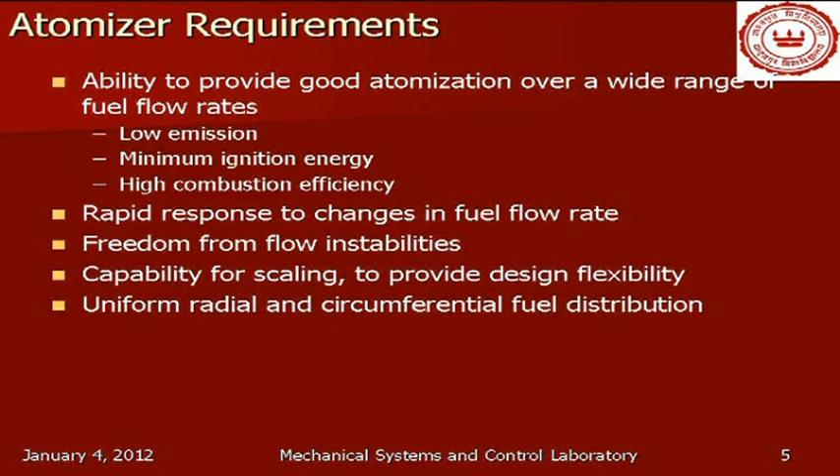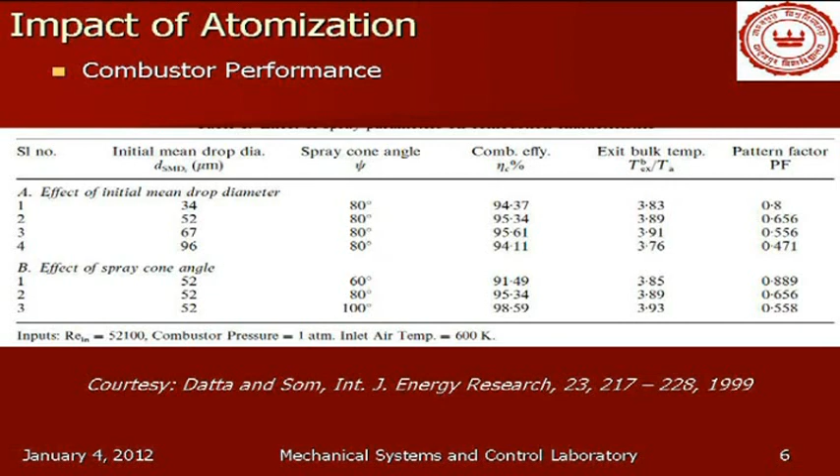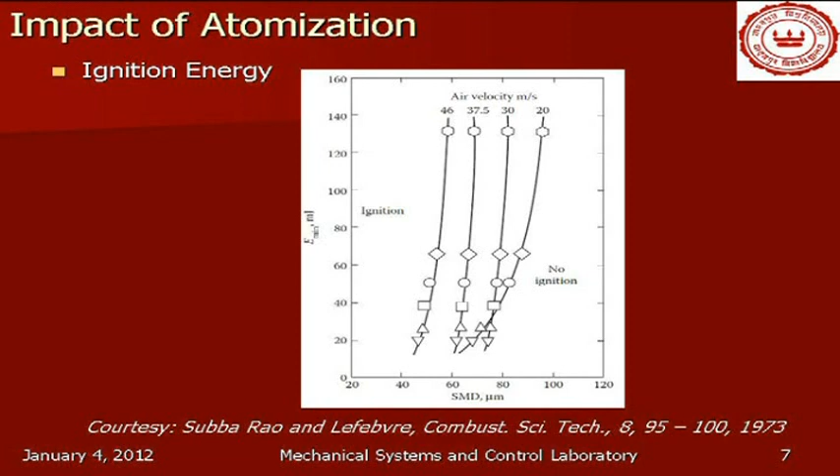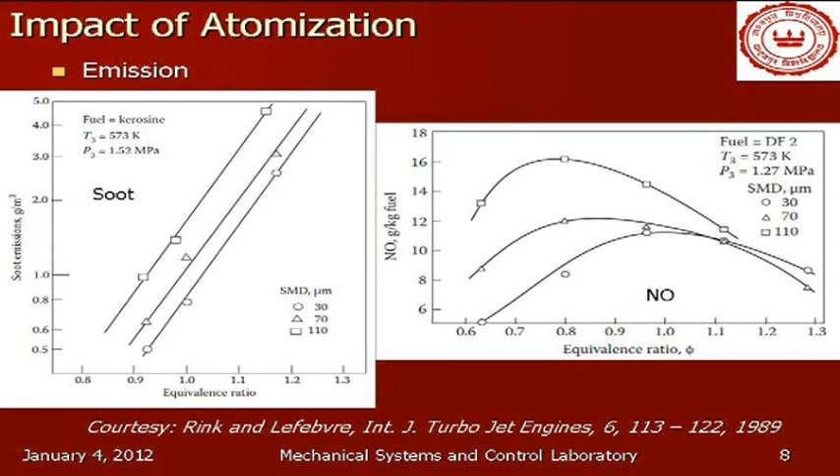But there have been a lot of studies in the literature where the impact of atomization on combustor performance has been studied. We can see that parameters like mean drop diameter and spray cone angle can significantly affect parameters like combustion efficiency and pattern factor. Also, ignition energy is significantly affected by drop size. But in today's context, what is probably more important is the fact that emission of pollutants like soot, NO, CO, and unburnt hydrocarbons can also be significantly affected by the drop size in the spray.

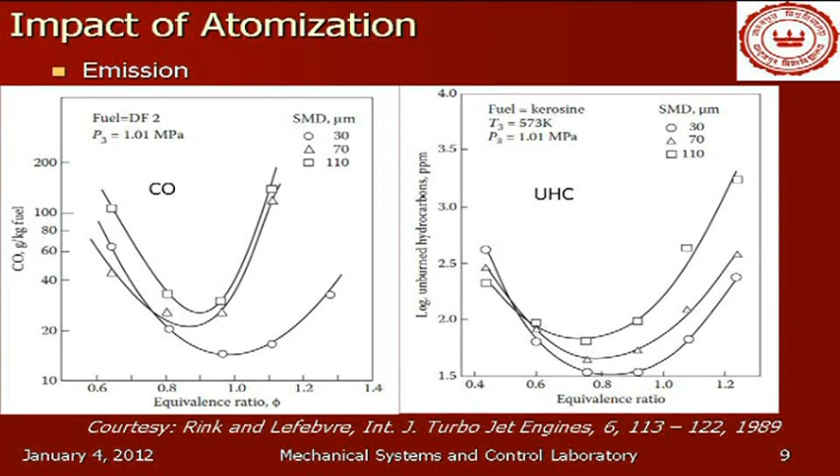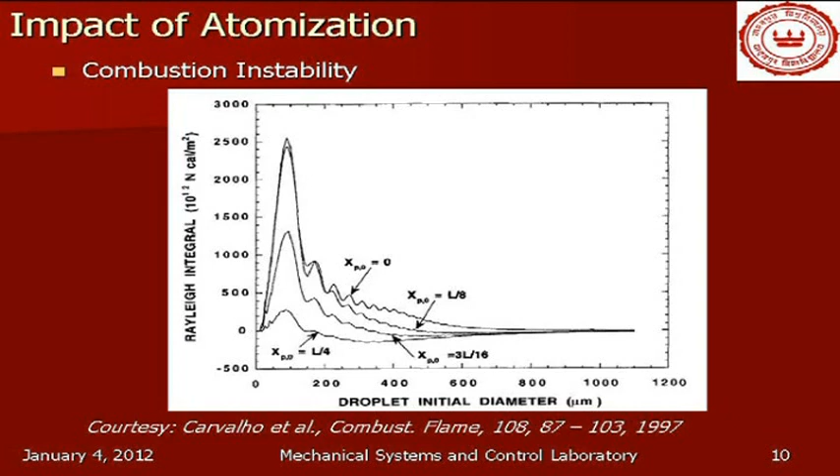Another impact of atomization, which is less often discussed, is that combustion instability can also be significantly affected by droplet initial diameters. So with all these things, when we are to get a good combustion, we obviously need good atomization. That is why this whole workshop is all about, I believe.

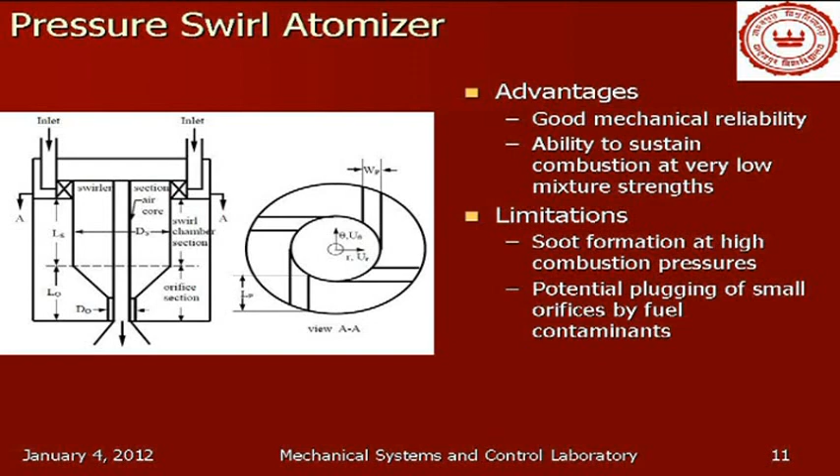As we know, the two major types of atomizers are pressure swirl atomizers, which have advantages like good mechanical reliability and an ability to sustain combustion at very low mixture strengths, but its limitations are soot formation and potential plugging of the orifice. On the other hand, air blast atomizers have the advantage of low soot formation, and the fact that

the outlet temperature distribution is primarily governed by the air flow. The changes in fuel flow do not significantly affect that, so pattern factor is less affected. But it has very poor atomization quality at startup, and it is prone to thermoacoustic instabilities.

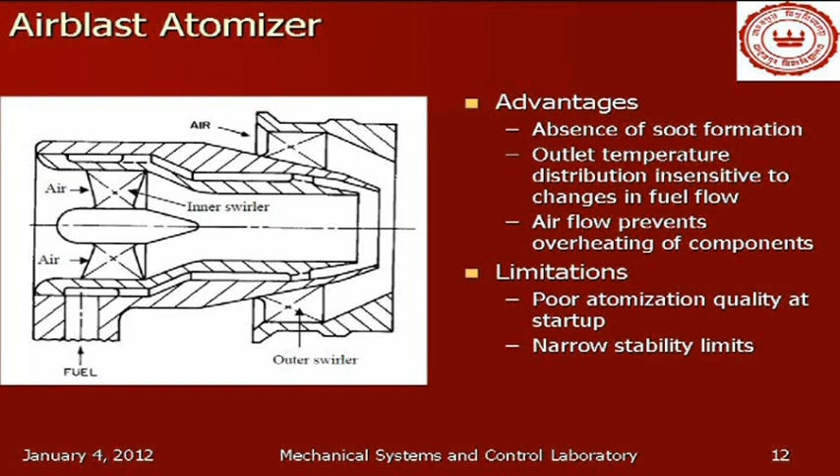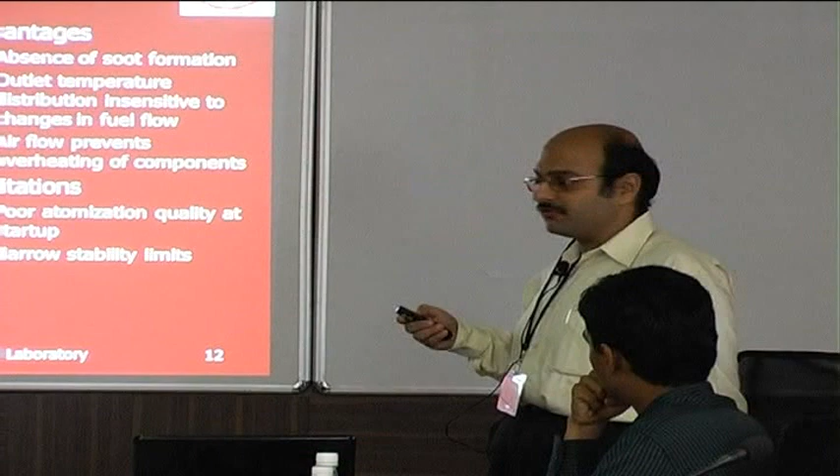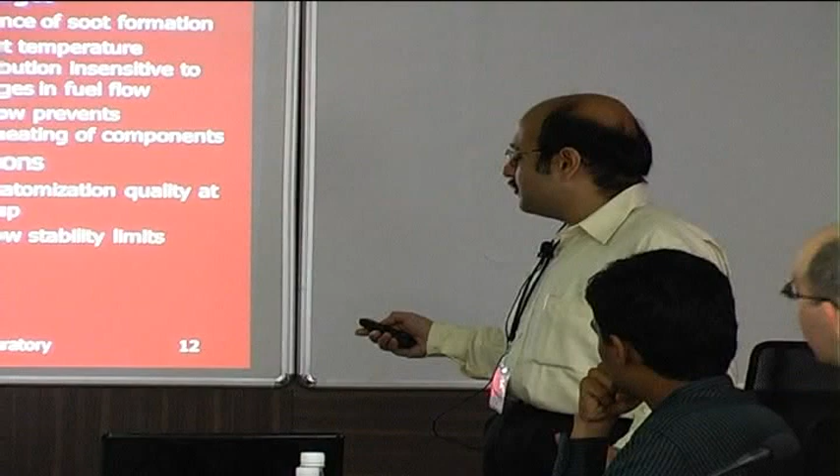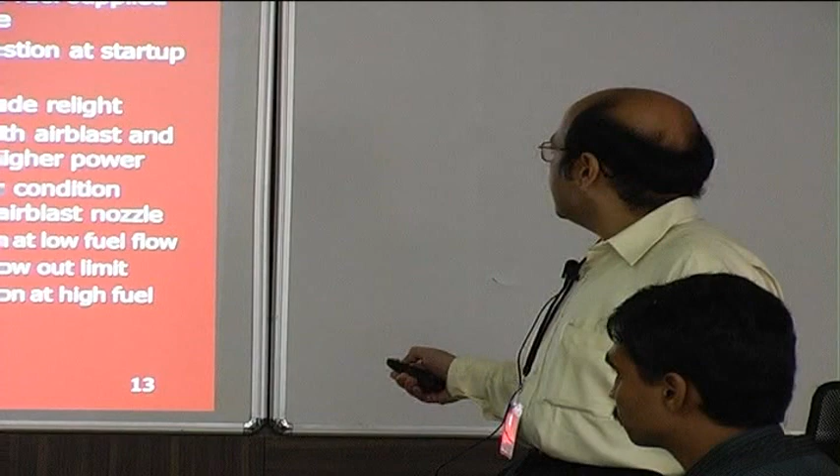Since these two common types of injectors do not satisfy all the requirements of a modern gas turbine combustor, people had to look for new types of atomizers. The most intuitive one being the so-called hybrid atomizer, which tends to put in the best of both worlds. One such design is the piloted air blast, which combines a pre-filming air blast atomizer with a simplex pressure swirl nozzle at the center.

At startup or low fuel flow rate, all of the fuel is supplied through this pilot nozzle, so that the characteristics are similar to that of a pressure swirl atomizer. As the fuel flow rate increases, fuel is supplied to both streams, and at high flow rates, most of the fuel goes through the air blast injector only. So we get good atomization at low flow from the pressure swirl part, and similarly improved lean blowout limit. But at high fuel flow rate, since it is predominantly like an air blast atomizer, it gives a low soot formation.

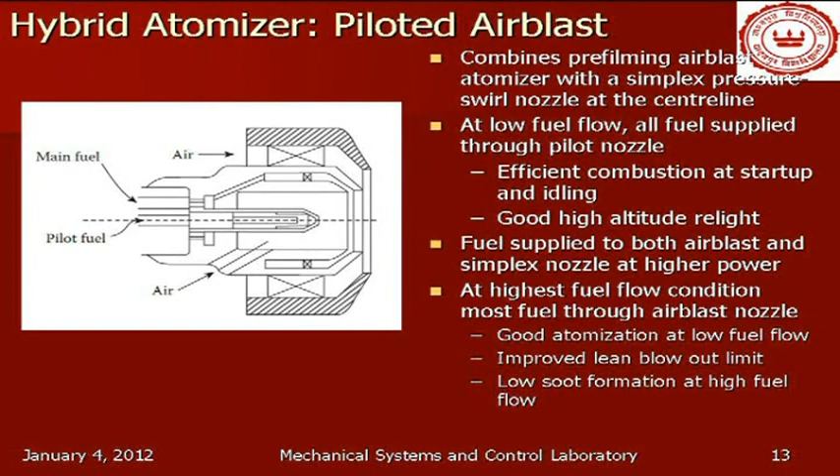A simpler version of hybrid atomizer is the air blast simplex, where all the fuel, unlike the previous case, is supplied through the simplex nozzle. Here what has been found is that an increase in air flow rate always helps in atomization, but increase in fuel flow rate can help or hinder the atomization depending on how it affects the relative velocity.

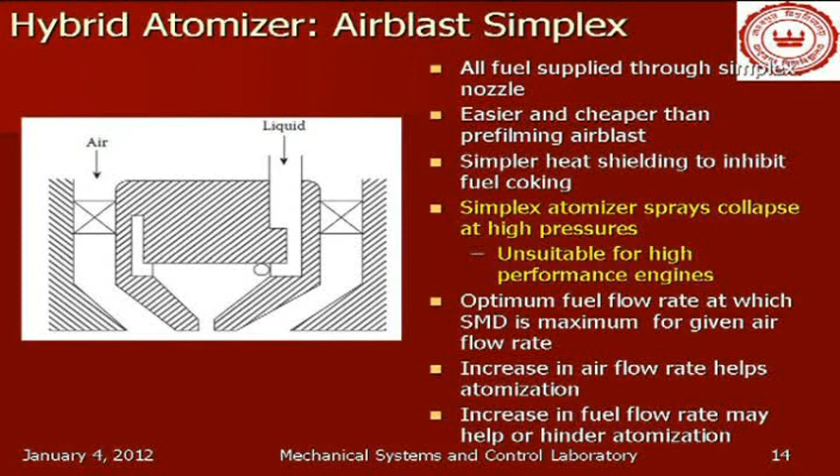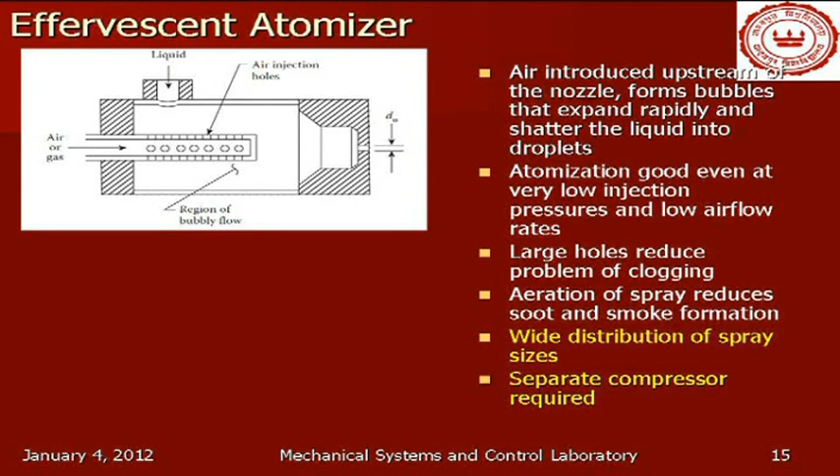Another innovative kind of atomizer, which Professor Raghunandan discussed at length, is the effervescent atomizer, which works on a quite different principle, in that here the liquid is not made into a thin film, instead it's the bubble of gas or air which shatters the liquid at the injector exit. The major advantage is that we get good atomization even with low injection pressures and air flow rates. The aeration of the spray also reduces soot and smoke formation, but it also has its limitations.

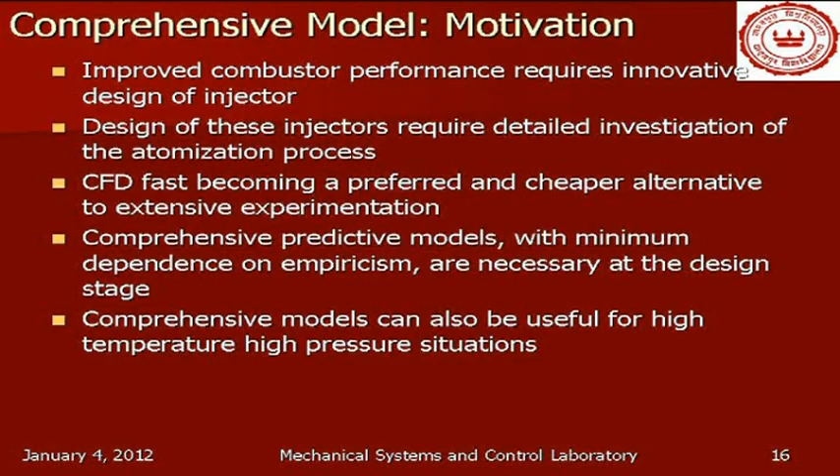As we go for these improved varieties of injectors, what we find is that there are too many parameters affecting their performance.

And so if we want to design these kind of injectors, we have to play around with too many parameters. If we want to do experiments with all of them, that will become a very costly proposition, at least especially at the design stage.

A much cheaper alternative is provided by CFD, especially with the availability of more powerful computers. Even laptops can solve so many of the important problems these days. So what is needed at this stage is to have comprehensive predictive models which will have minimum dependence on empiricism at the design stage. Of course, experiments are necessary, and I will discuss about that also, but there will be more modeling with limited amount of experimentation, mainly to improve the model that can be useful, and particularly these models can be very useful for high temperature and high pressure situations where experimentation is extremely difficult and costly.

So the major steps - this is how in most of the comprehensive models that are there in literature, this is how they conceptualize the spray formation process. The liquid sheet that comes out of the nozzle breaks up first into ligaments and then into droplets, and the comprehensive model should have these three elements.

First is the modeling of the internal hydrodynamics, where you get the inputs from the injector geometry and flow conditions, and as output you get parameters like liquid sheet thickness, liquid sheet velocity, cone angle, and these things then are fed to the sheet breakup model to obtain breakup length and mean droplet diameter. Using these inputs, there is a stochastic part of the comprehensive model which can give you some idea about size and velocity distribution.

Unfortunately, as far as I know, there is no comprehensive model which encompasses all these three elements. There has been quite a number of works involving the first two - Milind Jog is here, they have done quite a lot on this - and there has also been some amount of work on using the last two.

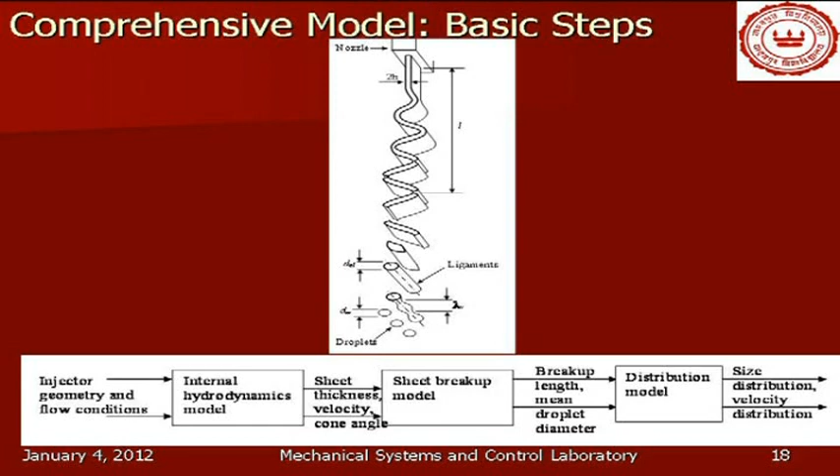Very recently we did some work using planar sprays. It was funded by ISRO, and we are also continuing now for gas turbine sprays in a similar thing.

So coming to the first part of it, the internal hydrodynamics of injector, this is probably the most well established part of the three submodules. Nowadays one looks at the detailed flow field of the two-phase flow using approaches like VOF, although some people use techniques like arbitrary Lagrangian Eulerian.

There have also been some work where less detailed models have been done, focusing more on the velocity profiles, and also some work on semi-empirical models combining experiments with the numerical models. But these detailed simulations have mostly been limited to pressure swirl atomizers.

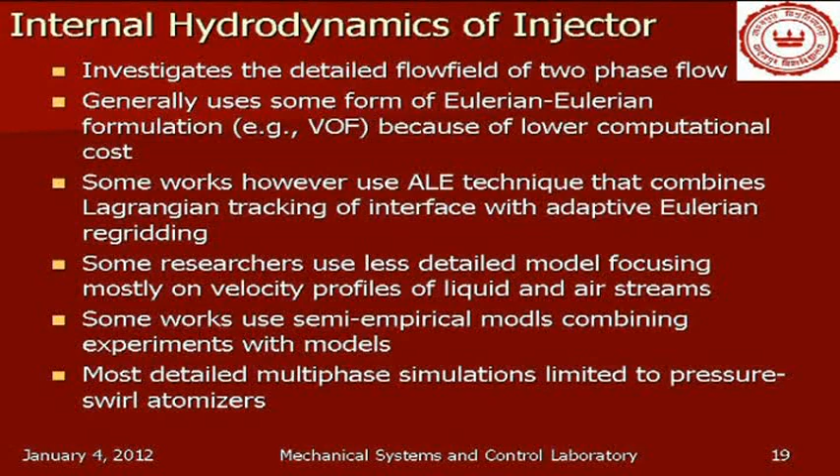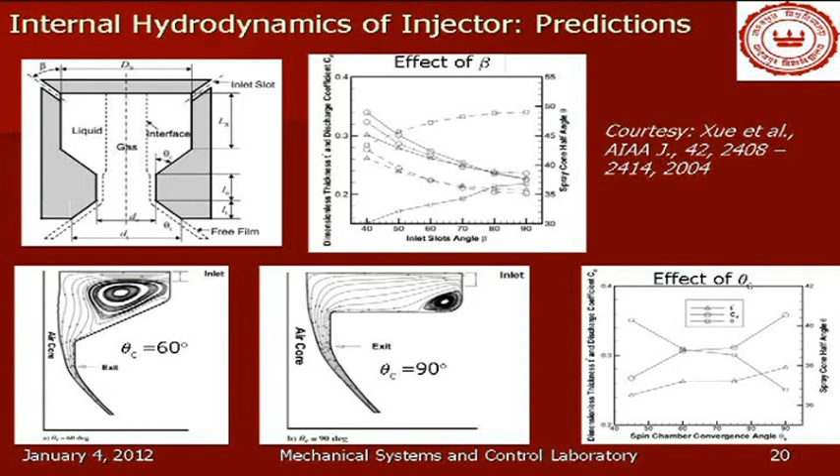But these models can be very useful, like this work on pressure swirl atomizer shows - you can use this model to investigate the effect of varying the design parameters both on the details of the local flow field as well as on global performance parameters like liquid sheet thickness, discharge coefficient, etc.

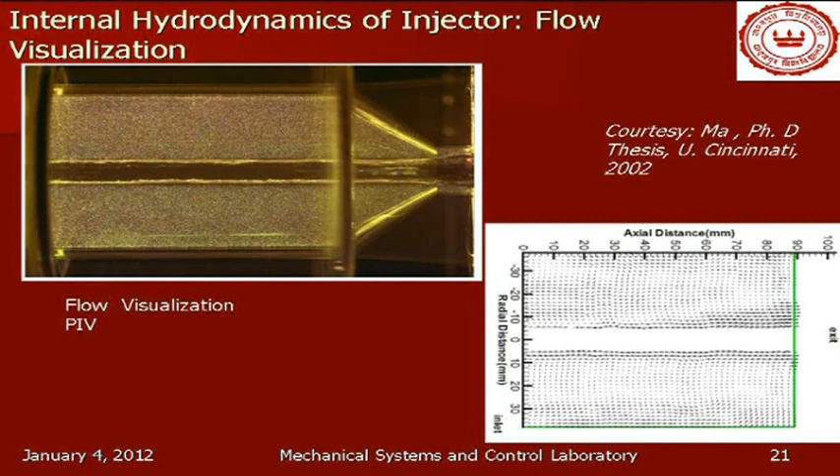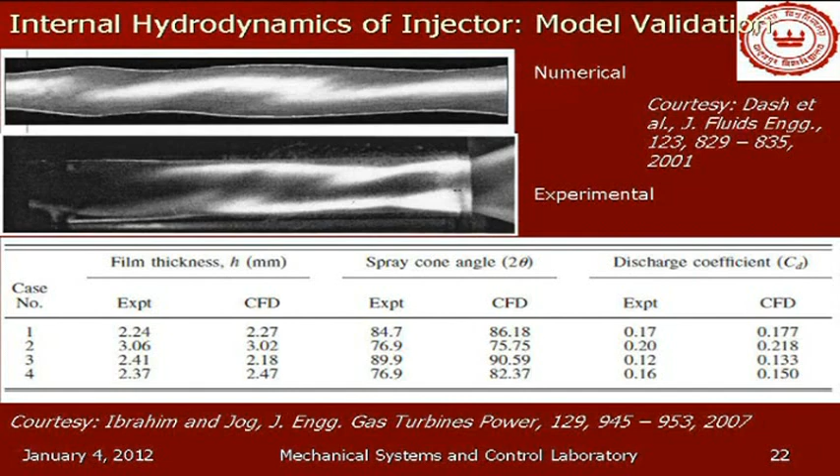But these models need to be verified and fine-tuned with the help of experiments, which can be both flow visualization experiments and PIV studies for investigating the details of flow fields and phase boundaries, and also validating the performance parameters - the outputs like film thickness, spray cone angle and discharge coefficients, which are directly useful.

In our group also we have been doing, we are trying to do similar work on a design of hybrid atomizer. The details are put up on the poster outside. Here we are trying to look at features like providing recesses, which Professor Raghunandan also mentioned.

In fact, when he was showing this slide, our student Shovik was sitting over there. I could see him looking and smiling because he thought he was doing something very innovative.

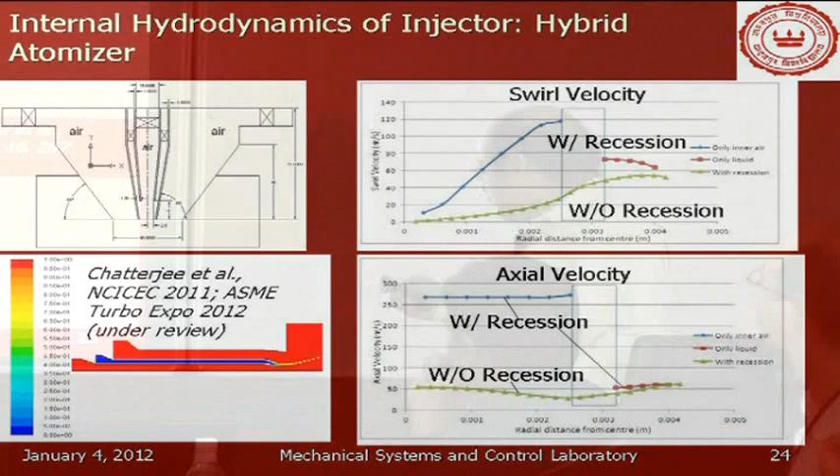In fact, in the most comprehensive review paper by Professor Sojka, this has been listed as one of the areas in which more work is needed. Now we're coming to the second part of it, that is the breakup of liquid sheet. This is probably the most controversial part of the submodule.

Here, what is normally done is people use some idealized configuration like a planar sheet or a cylindrical axisymmetric sheet, and very rarely a conical sheet, to represent the liquid sheet coming out of a gas turbine injector.

The common approaches followed are people mostly rely on linear stability analysis, although there has been a significant amount of work on nonlinear stability analysis.

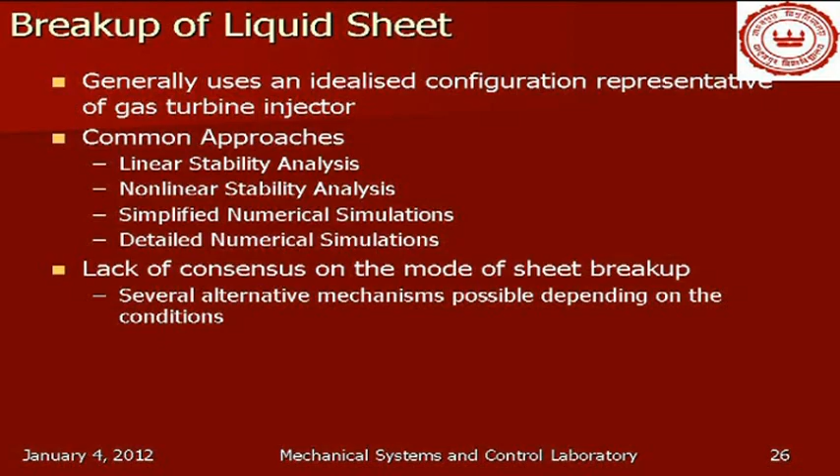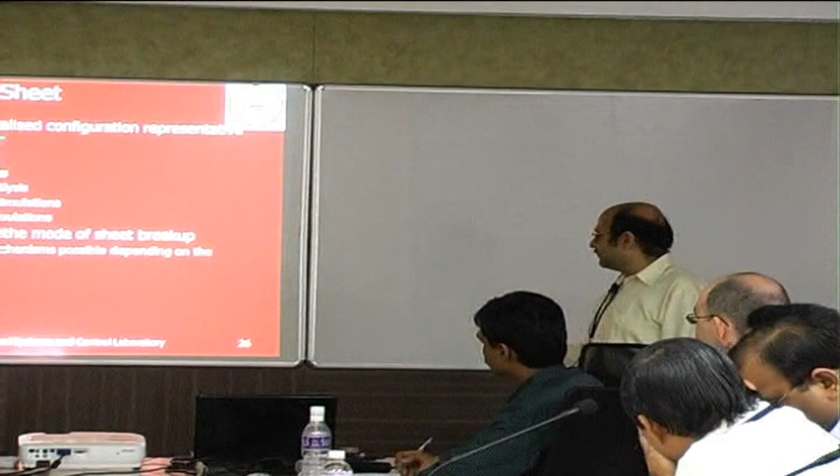There have also been a lot of numerical simulations, both simplified ones where reduced order models are done by lumping in one dimension or similar approaches, and of late some very detailed numerical simulations. But the major problem is that several alternative mechanisms are possible depending on the conditions, and there is quite a bit of lack of consensus on the mode of sheet breakup.

I would like to share with you one of our very recent experiences. We had sent out a paper to Atomization and Sprays, and one of the reviewers was extremely dissatisfied with the breakup mechanism that we adopted. But finally we could show that other people had also adopted a similar approach, and probably that got the paper through.

But definitely a lot more work needs to be done in this area. In the linear stability analysis, the information that comes out from the studies are mostly the maximum growth rate and the critical wave number that produces the maximum growth rate. Generally a temporal stability analysis is done because that is easier to do.

The most unstable wave number gives us an idea about the droplet size, whereas the breakup time, which translates to breakup length, is obtained from the information on growth rate and the amplitude ratio of the amplitude of disturbance at breakup to that at the initiation.

While in a linear analysis this maximum growth rate is easily obtained, to get this amplitude ratio from a linear analysis, people take recourse to various ways. Many people, even for non-planar sheets like axisymmetric sheets, use the relation derived for planar sheets.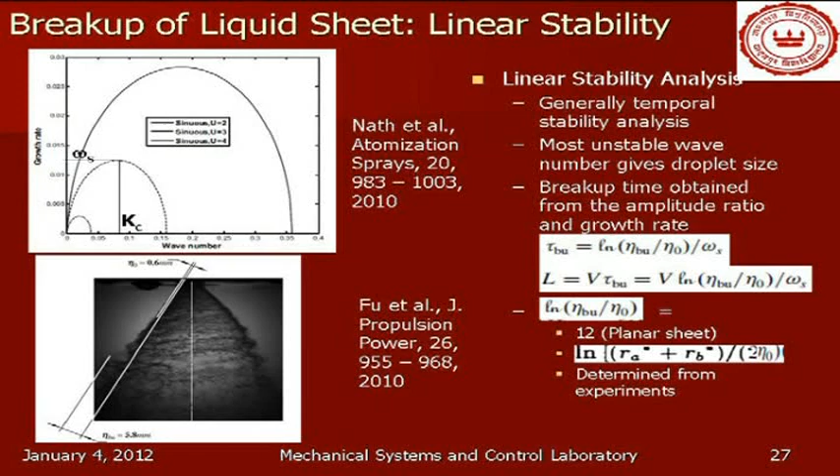But probably a more sophisticated approach would be to combine this linear stability analysis with experiments and directly determine the amplitude ratio at breakup from the experiments, as has also been recently done. But this shortcoming can be overcome if we go to nonlinear stability analysis.

As we know, the breakup mode of disturbance can be sinuous, varicose, or even a combination of the two. From linear stability analysis it is generally believed that the sinuous mode will always dominate. But many nonlinear studies, including one of our own recent studies, have shown that depending on the parameters, there can be situations where both the sinuous or the varicose modes can dominate.

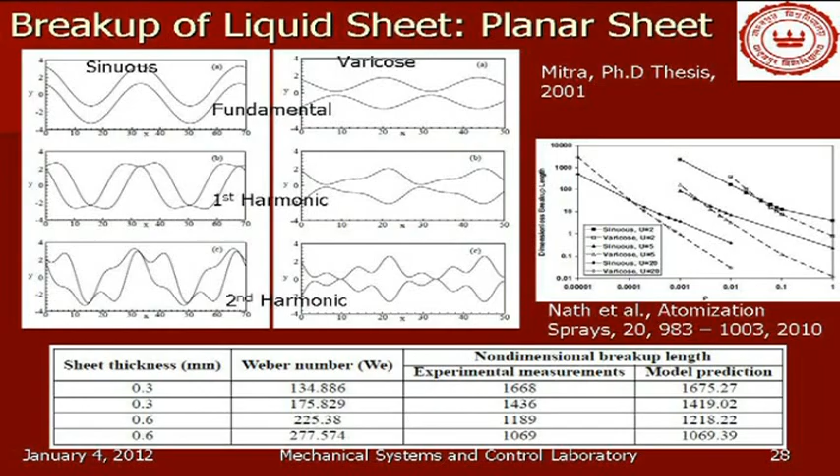These kinds of nonlinear studies have also led to good agreement with experiment, but again here there is a catch. These results predicted by nonlinear stability analysis are strongly dependent on the initial disturbance parameter, the initial amplitude of the disturbance eta zero, which is something very difficult to measure in an actual experimental situation.

Unless it's a very controlled experiment, any kind of disturbance may come up, and it is difficult to say with confidence what the exact disturbance was. So often it may end up that you will get some amplitude ratio, some initial amplitude, which will give you good agreement with experiments.

But what most people do, I believe, including us, is make sure that the disturbance amplitude we are taking is within the normally accepted range, or the range that is normally encountered.

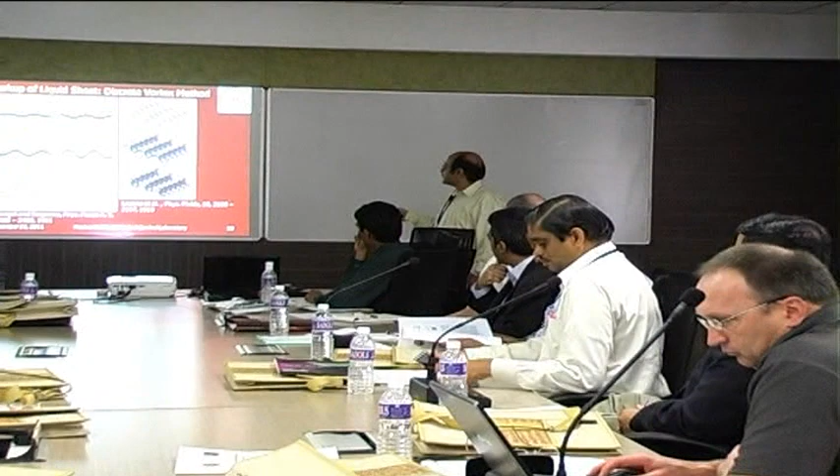Other than using this nonlinear stability analysis, people have also used the discrete vortex method for doing the same thing, that is getting sheet breakup profiles, and it is possible to get both axisymmetric and non-axisymmetric modes here.

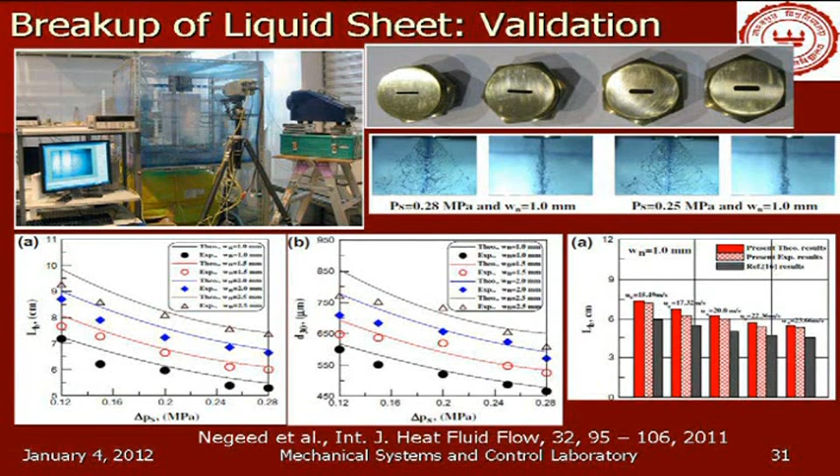In most of the studies, it is assumed that the sheet breaks up in a longitudinal manner, and using that model there have been quite a number of studies which show excellent agreement with experiment, as this very recent study also shows.

But some high speed visualization studies show that there can be other modes of breakup, like cellular mode. So far as modeling is concerned, much more work is needed to ascertain the breakup mechanism. This high speed visualization is one way of ascertaining that.

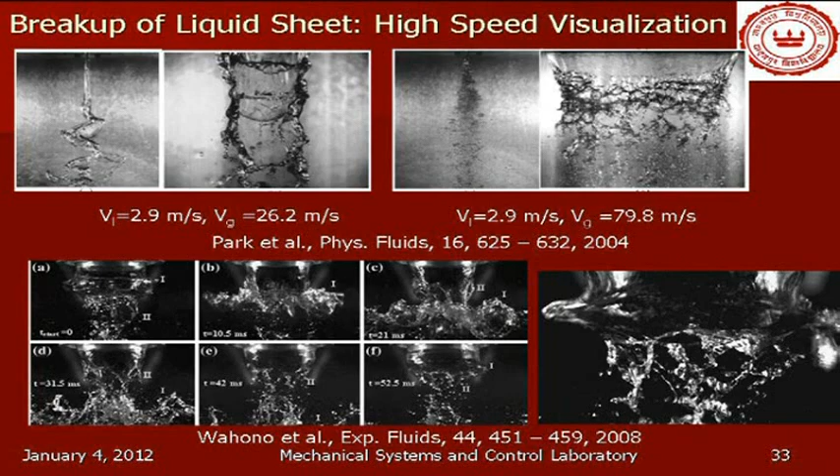And the other way is, of course, to go for very detailed numerical simulations like these DNS results show. With this kind of detailed simulation, it is possible to get an idea about both the flow field as well as the sheet or jet breakup profile.

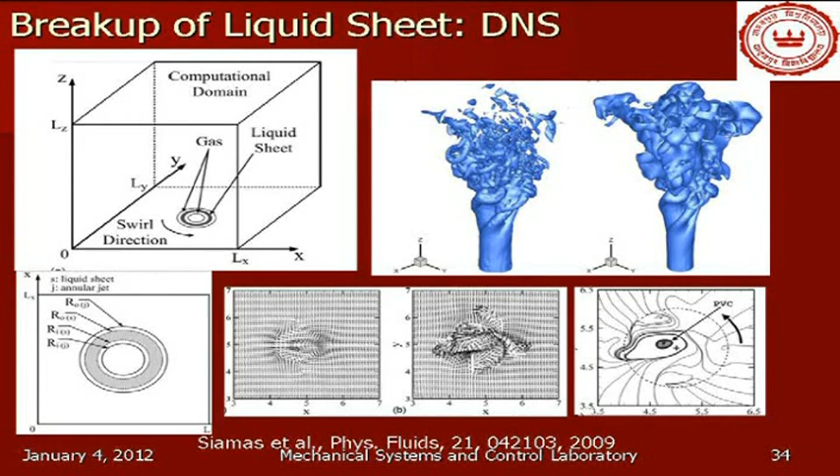There have been some studies using boundary element methods also, and in these studies they have simulated, combining some Lagrangian tracking also with the sheet breakup model, to simulate the behavior of a large number of droplets. The number of droplets studied is sufficiently large so that it is statistically meaningful to get a droplet size distribution directly from the simulation.

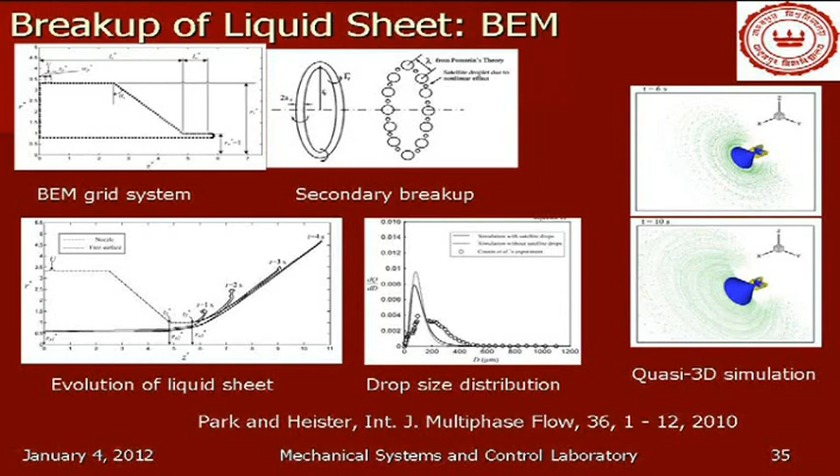So that can be a very comprehensive kind of model. But both this DNS and this kind of model, as also the next one I am going to show, these are computationally quite intensive, and certainly at the present level of computational resources not suited as design tools. But they can definitely enhance our understanding about the nature of sprays.

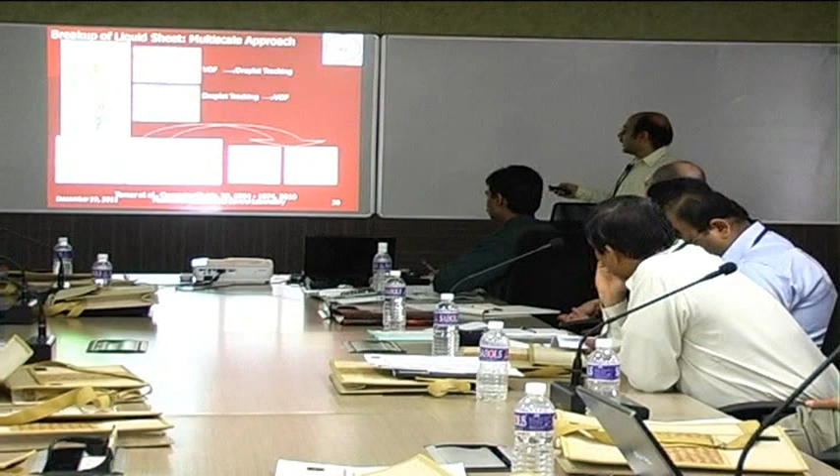There has also been a multi-scale approach in which Lagrangian droplet tracking has been combined with the volume of fluid method, and that also gives you directly the droplet size distribution at different regions of the spray.

One of the authors of the paper, Dr. Gaurav Tomar, he is also here. So this is the present status of the second part of the submodule, that is the droplet breakup module.

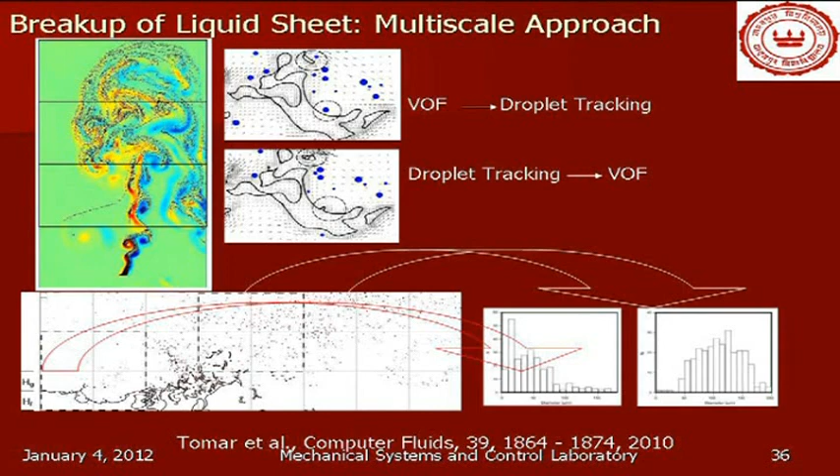Coming to the third part, which is the droplet size and velocity distribution. As I mentioned, this is the stochastic part of the comprehensive model. It tries to model the uncertainties that are built into the atomization process. The two commonly used approaches are the maximum entropy formulation and the discrete probability function.

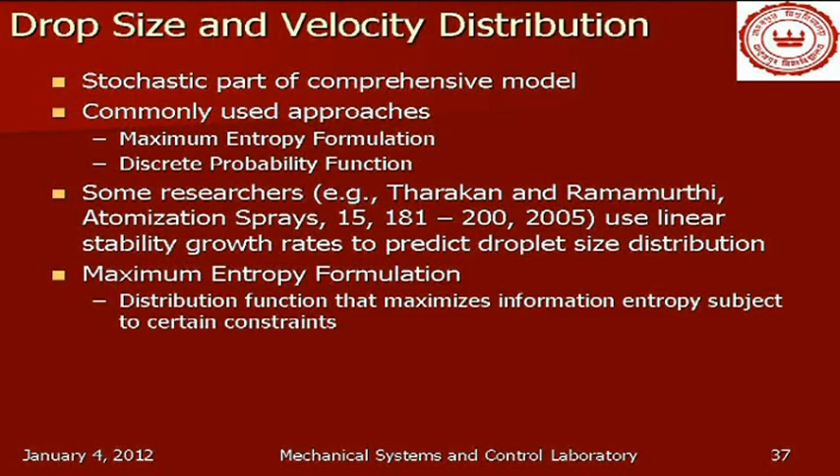Although there has been some work, like one by Dr. Tharakan and Dr. Ramamurthi, which made a very intuitive use of the linear stability growth rates to predict droplet size distribution, mostly the prediction of droplet size and velocity distribution is done using this maximum entropy formulation, where the distribution function that maximizes the information entropy subject to certain constraints is taken as the most likely distribution.

But there are several variants of the maximum entropy formulation available. One is how to define the distribution function - it could be number based or volume based. Then the statistical approach that will be followed, and the constraint conditions - what are the constraint conditions to be used?

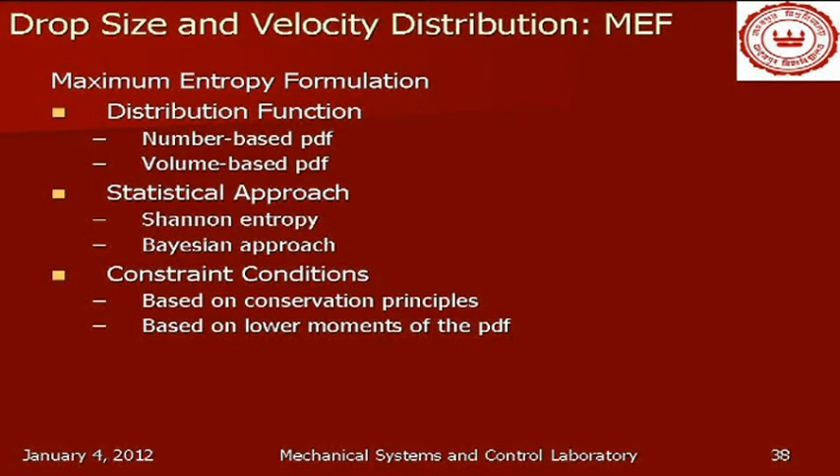My colleague Professor Amitava Datta has detailed these issues in the book of abstracts.

So there has been some work where both this MEF, this maximum entropy model, has been coupled with both linear stability analysis and nonlinear stability analysis, and there has been good to reasonable amount of agreement. But considering the complexity of the atomization process, even what appears to be not so good an agreement should actually be quite acceptable.

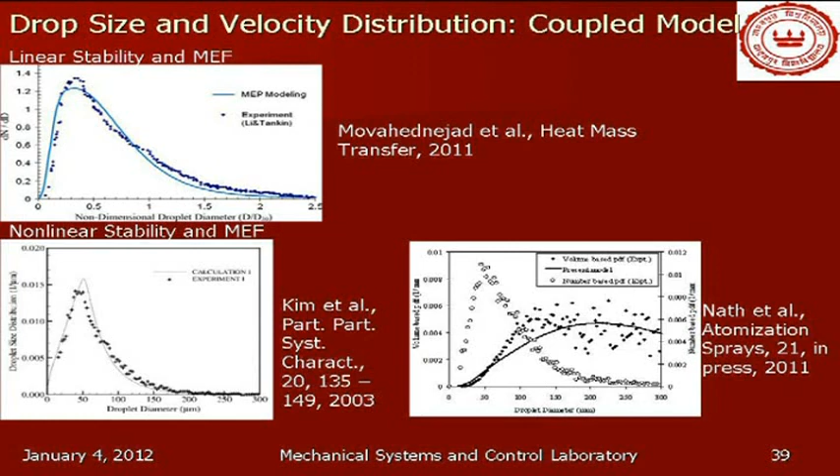But as I mentioned, in this part also there are several open issues, like what kind of statistical approach to follow. The original workers used this Shannon entropy approach, but nowadays people are using the Bayesian approach. The disadvantage of the Bayesian approach is that it requires an a priori specification of the probability distribution function, but it facilitates a much easier conversion between volume based and number based PDF.

Then, what kind of constraint conditions are to be used? Generally people use constraint conditions which are based on the conservation equations, but in a mathematical sense they imply constraining on the basis of higher moments. There have been certain alternative approaches which stress that the constraints should be based on the lowest moments. So that is also an open issue.

Again a very important issue is, if you follow this conservation equation approach, then how to write the energy equation. Normally what is done is the liquid sheet kinetic energy and surface energy are balanced, but there is a school of thought which says that the inclusion of internal energy can also be significant.

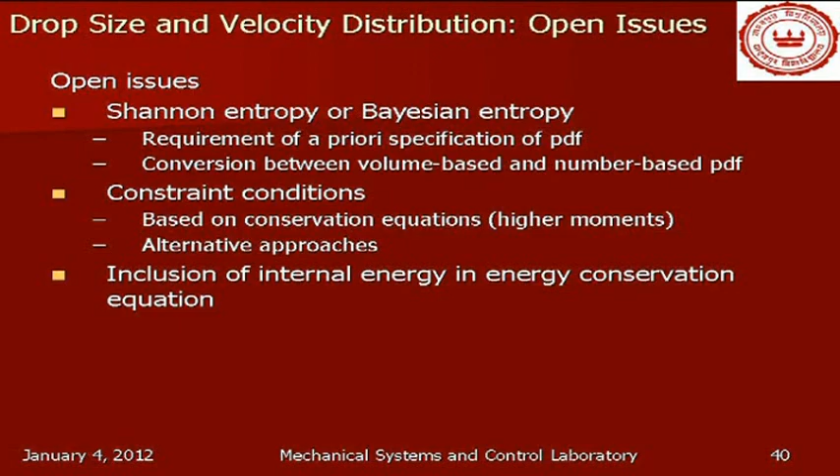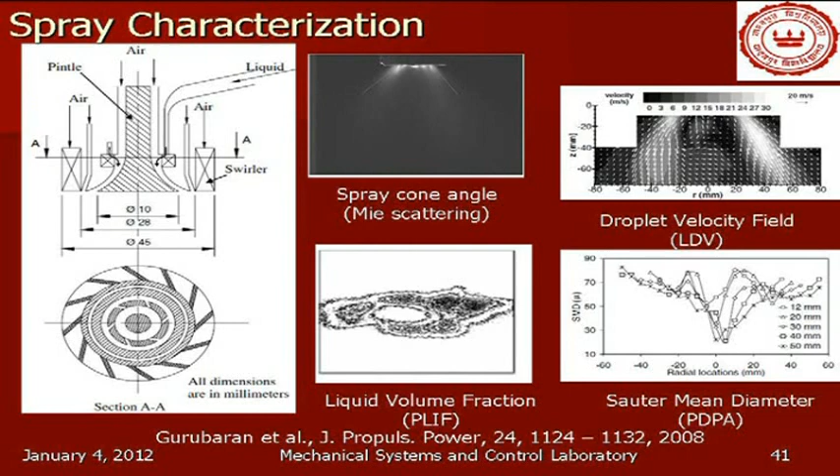So I just mentioned this, I could not elaborate on it. To sum up, it is well known that spray characteristics are crucial to the performance of gas turbine combustors, and conflicting requirements of spray characteristics lead to the design of advanced injectors. For these design processes, comprehensive models can be very helpful, but to develop such comprehensive models, there are several issues which are not yet satisfactorily resolved. Both advanced visualization techniques and advanced computational techniques can facilitate resolution of these issues.